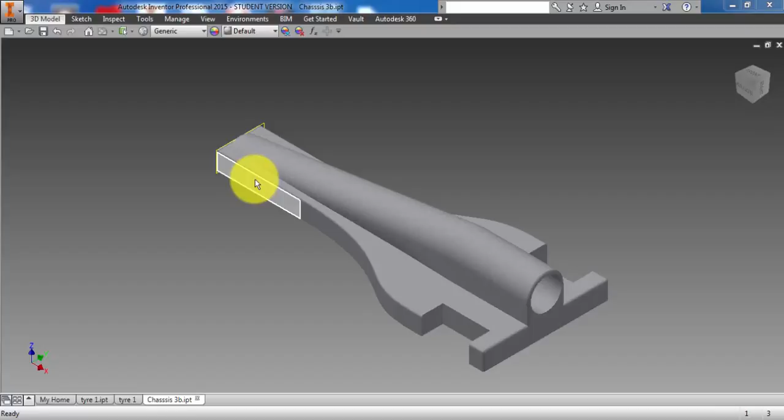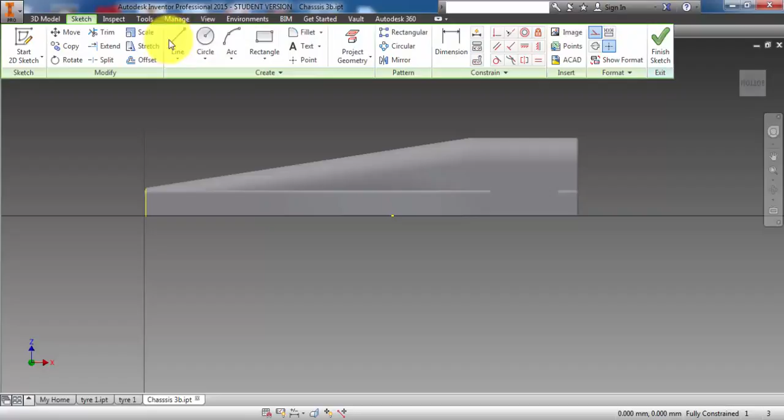Once you have the radiuses on the edges of the chassis, the next thing to do is to create axle holes. So I'm going to click on that side, I'm going to click on sketch, and I am going to click on start 2D sketch. And for this first part I want to draw a construction line. So click on that one there, left click, construction, and we want this to be a straight line, and I want this line to be as parallel as possible with the bottom, so do keep it straight. Left click to enter there, then press escape.

Now the axle hole is going to be on this line, and that line needs to be in such a position so that when the wheel is fitted there's going to be at least a 2mm clearance between the bottom of the chassis and the track. Now the radius of my wheels are 12mm because they were 24mm diameter. So from that 12mm, 2mm is going to be from the track surface to the underside of the chassis, and then from there up to the hole, that would be the other 10. Just to play on the safe side, if we make it 9.5, that'll give us 2.5mm clearance underneath, just to make sure that we stay within the limits.

So we need to put a dimension on there. So click on the dimension tool, click on the underside of the chassis once, click on that yellow line once and drag it to the left, and on there, left click, and on there we then type in 9.5. Green tick. That line moves up a little bit, and because my wheel is 24 diameter, that means from the front to here we need to have at least 12 millimeters. So I'm going to make it 13.5.

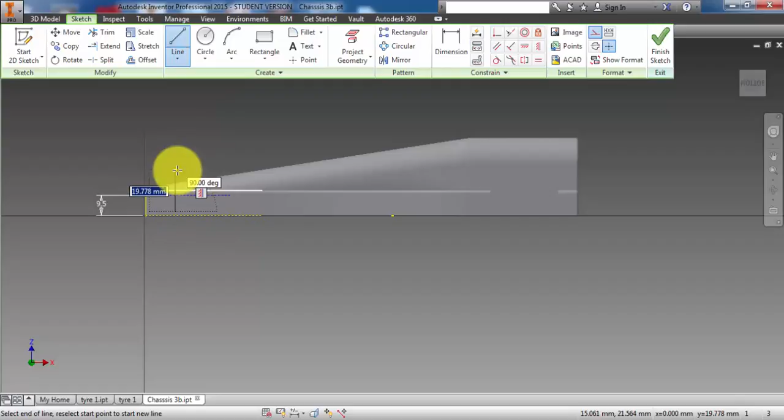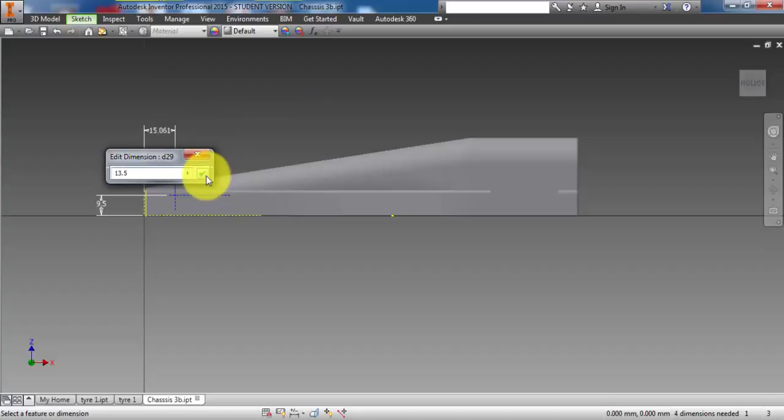So in a similar fashion, construction line is selected, straight line, and I'm going to draw in a line nice and vertical in there. Again, it's a construction line. Press escape so that doesn't follow you around. Sketch dimension. So from that line to the very front, we want that to be 13.5 millimeters, and we can tick that. Now right where they cross, we need to drill a 4.5mm hole all the way through the chassis.

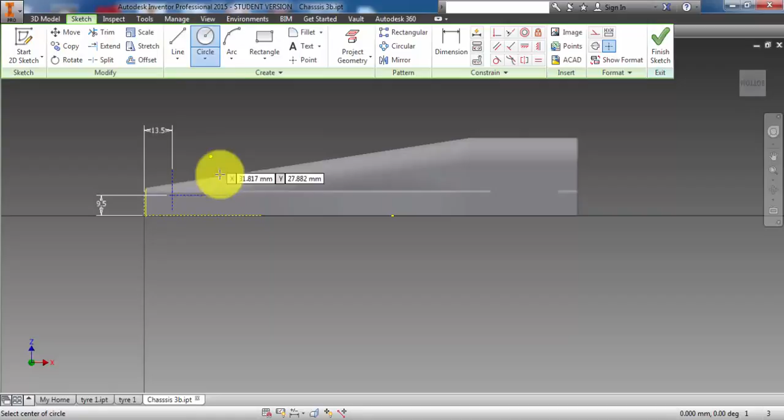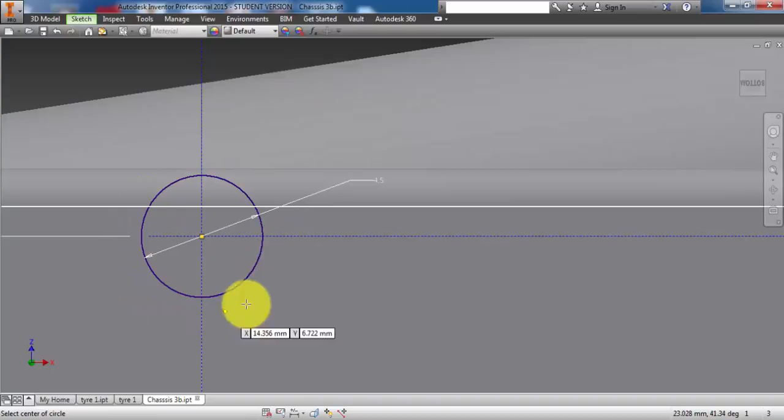So I'm going to click on sketch again. I need to take off construction line because I want this to be a solid line. Click on the circle tool, and I think it's best if I zoom in a little bit to make sure I get accurate. So from there, drag out a circle, just take your finger off the button, then simply type in 4.5 and press enter like that. Now I'm a little bit concerned that that didn't go green, but we'll see how this goes. So with that done, sketch, finish sketch, and we are now ready to extrude.

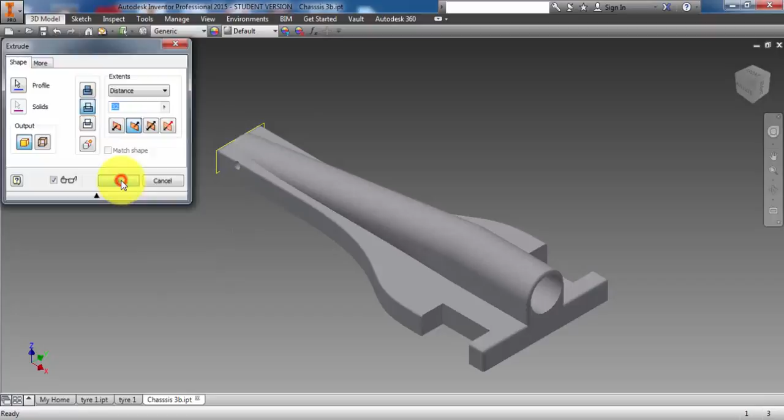So 3D model, extrude, and we want to move that way, and we want to go through, we'll say 32 because I think the chassis was about 30. Okay, and then that looks as though, just click on there, yes, that hole clearly goes straight through. We need to do exactly the same at the back here.

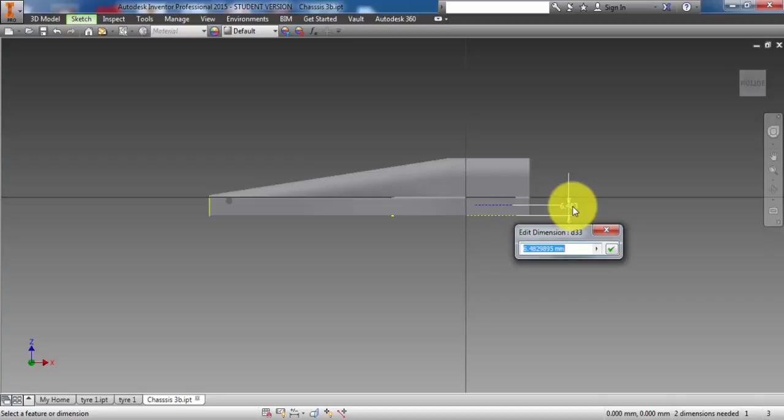So click on that surface, create new sketch, and in a similar way we're going to start by putting in construction lines. So a nice straight construction line. Oh, that doesn't look like construction. Sketch, put in a construction line, line, keep that nice and straight, left click, then put in a dimension, and we'll see from there to the construction line needs to be 9.5. Okay, and going the other way,

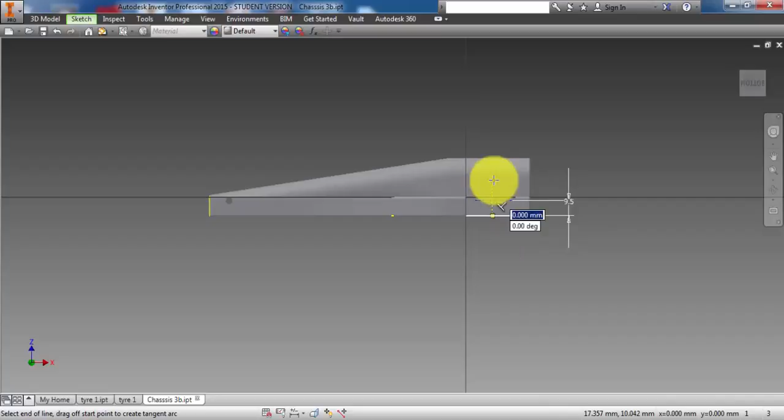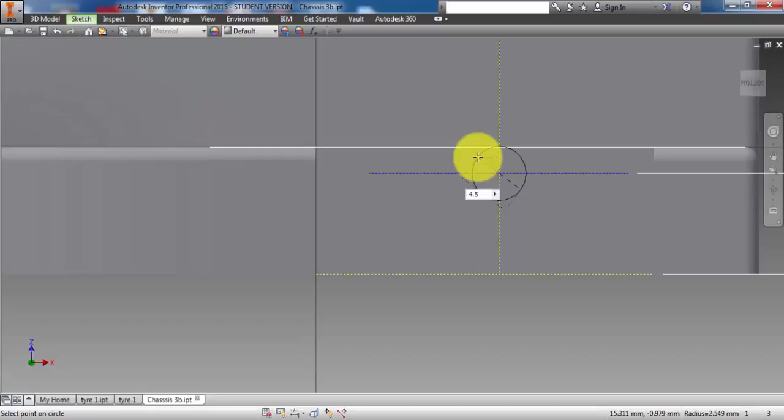sketch, construction is still selected, straight line, and it automatically finds the center there, gives a little indication there. So left click, straight up there, escape to enter, and then we can zoom in to make sure we do this accurately. Sketch, we need to come out of construction lines, not selected now, click on circle, right where those two lines meet, left click, and we're going to type in 4.5 millimeters, press enter. This time it has gone green. I'm going to finish the sketch there, finish sketch, and we'll just get a better view by clicking on that corner to see what it looks like, and then we are going to extrude that.

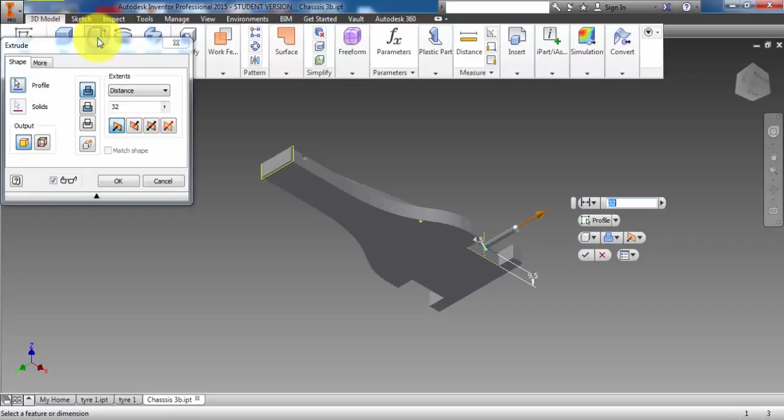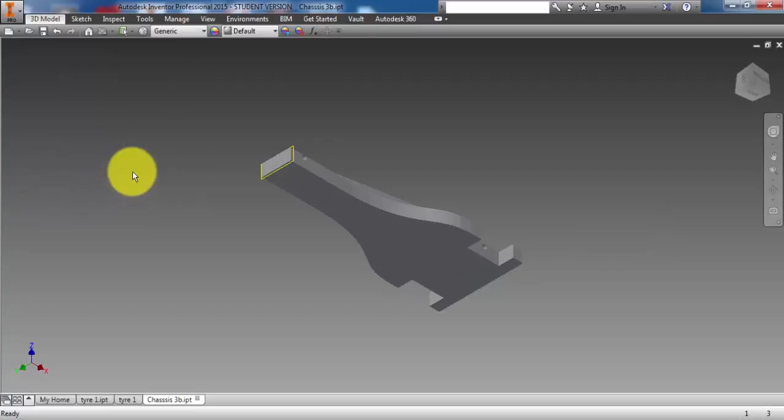So 3D model, extrude, and this time we want to subtract material, and it is a little bit broader this time, so I think I'm going to type in 55, or a bit more than 55. I'll type in 66 because that's quicker than typing in the 65. Okay, and that has gone all the way through. So then we can take a look at that. Yes, and now we have both holes going all the way through, ready to take the axles.